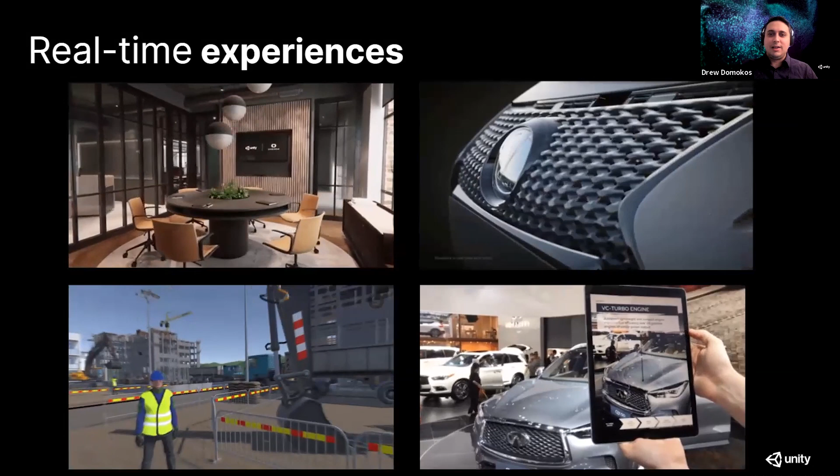And finally, what was 2D is now 3D. So rather than viewing content on the screen, we can see it in a real local environment, or we can be inside a virtual showroom or gallery. Working with 3D content, like what we see here, provides a number of benefits. First being immersion. As our world is in 3 dimensions, we move and think and experience in 3D. So compared to traditional static content, the extended spatial presence of being in a virtual environment brings enhanced problem solving, higher levels of engagement, understanding, and much more.

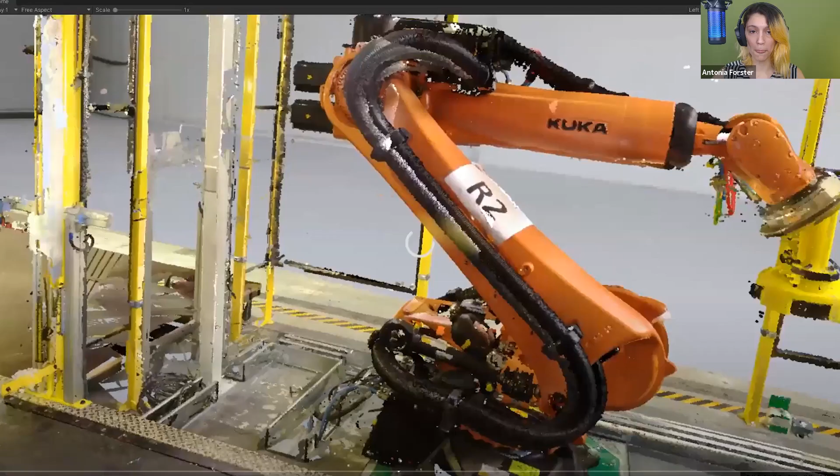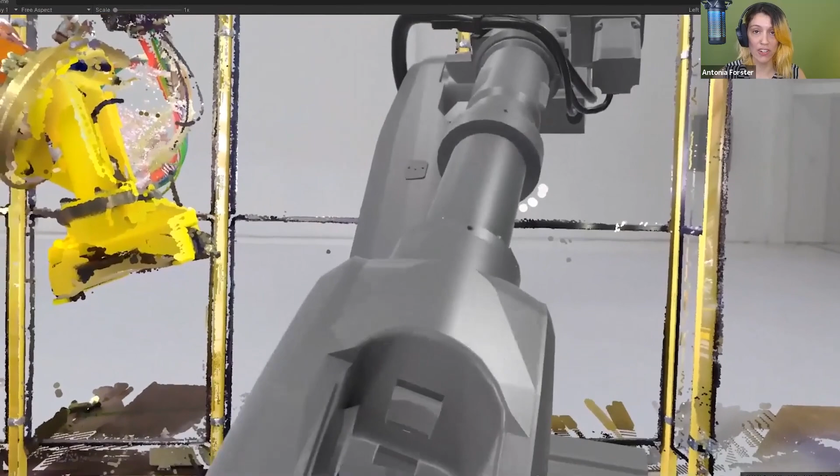This is a sneak preview of what you will be able to make by the end of this talk. First, we're going to use a point cloud scan of a factory to validate the position of a piece of equipment. I'll show you how to implement clash detection to check whether an engineer can safely access and operate a piece of machinery, or whether that would cause a clash or collision in that specific location on that site. This can save a vast amount of time and money in relocating equipment.

Then we'll take that same scene and implement VR safety training on top, so that you can teach the worker how to safely move across the job site, hazards that they should be aware of, and also how to follow the correct procedure to operate machinery.

So here's what we'll be covering today. First, why do you need VR safety training? What are the benefits and what's the return on investment? We'll be looking at case studies from industry leaders and looking at what is possible just using the Unity editor alone. Then I want to show you what's possible with two additional pieces of software, both verified solutions partners of ours with products that work on top of the Unity editor.

First, we'll look at Interact by Light and Shadows and some of its capabilities, which includes importing point cloud scans of your environment, implementing clash detection for validating equipment position or safety, VR training, and even things like ergonomic analysis.

Then I want to look at a second solution called Weaver. Weaver is also a solution for VR training, but is quite a different set of tools than Interact. Specifically, it allows you not only to build VR training, but also to deploy it at scale across your organization, manage who is accessing it, receive analytics on their performance, and so on. So you can go from a proof of concept to really an integrated solution across your enterprise or organization.

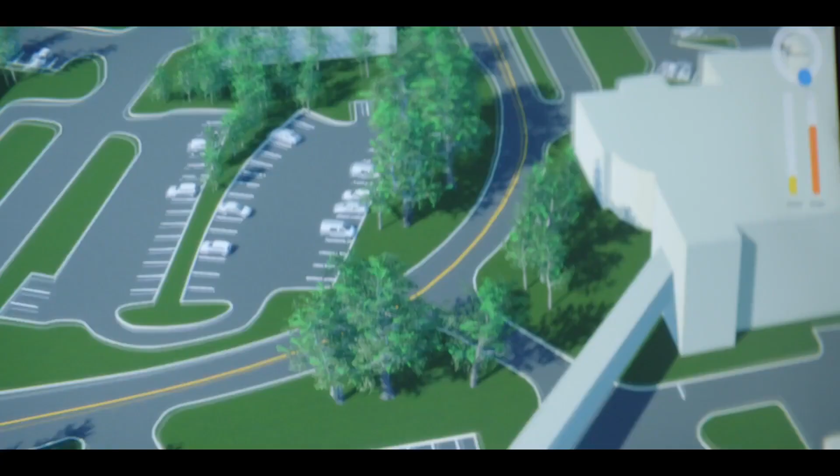Next, we have the engineering, how it will be built. Foundations, structure, interior build out, different systems, mechanical, electrical, plumbing. When you see something in scale in the real-time engine, it affects your decision-making. You think about logistics, mobilization, you think about safety differently.

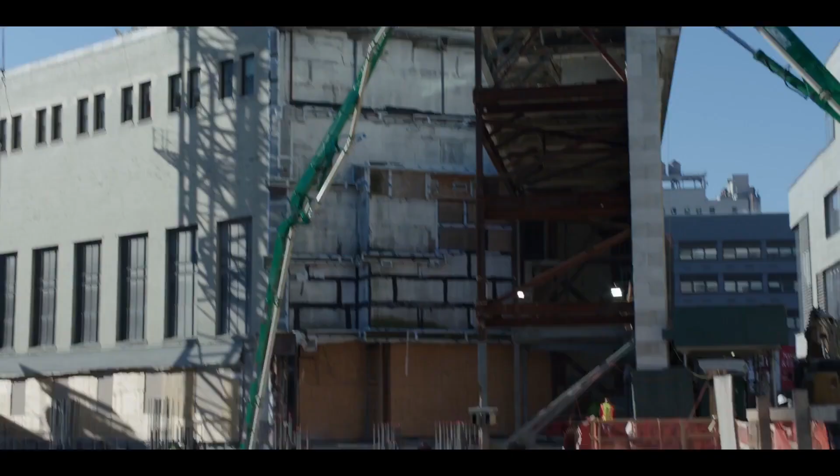Third, you have construction, the actual excavation and the erection of the building itself. With on-site construction, augmented reality, we can actually overlay the entire building in front of the developer. It gives us an opportunity to solve problems before they arise and to give our clients what they want.

Fourth is marketing. A lot of times you're building condominiums, office space above, retail space below. You need to market, you need to sell, you need to get tenants inside of your building. Well, we have this virtual, dynamic, real-time environment now that this potential client can go and walk through to sell the space. And finally, the maintenance, maintaining the day-to-day of the building and all of its systems.

We're able to do photogrammetry of the infrastructure behind these walls before the drywall goes up, so we can be minimally invasive when we need to inevitably go fix that pipe. The use cases are endless. If we allocated enough resources to this, we could change a $10 trillion industry. We can change how buildings are built. Without Unity, all this wouldn't be possible. Let's just put it that way.

So as you could see in that video, Unity can really be leveraged for a whole range of use cases. So in this webinar, let's specifically look at VR safety training. What problems can Unity solve, and what benefits does it bring to you?

Well, last year's Safety Management in the Construction Industry report by Dodge showed that the most effective safety training is site-specific. At the moment, 75% of contractors rely on supervisors or foremen to conduct training for them on site, as opposed to using a third-party trainer or online methods.

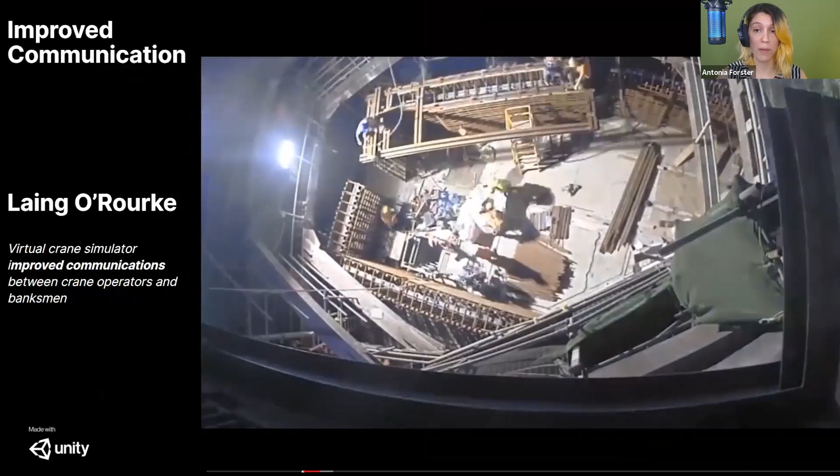Laing O'Rourke, one of the largest privately owned construction companies in the UK, used Unity to create VR safety training. They created a crane simulator to train their lifting teams. The training scenario is multiplayer.

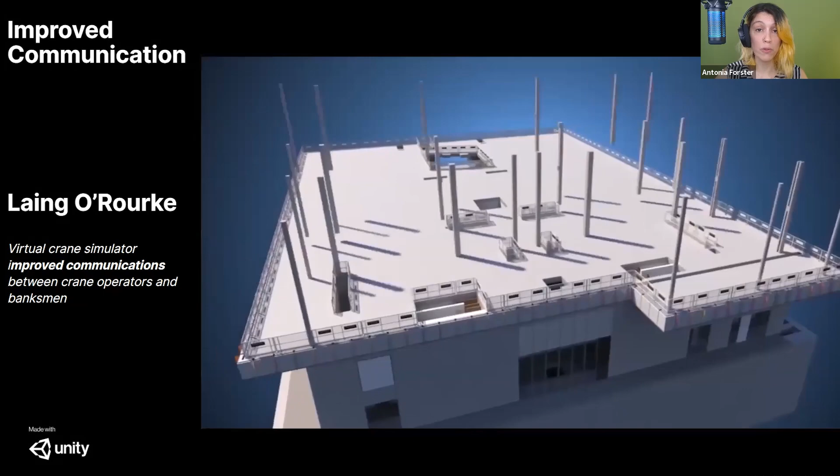The crane driver is sat inside a virtual crane and has to follow a banksman's instructions. This not only improved communication on their lifting teams, but also between different teams and had knock-on benefits across the whole organization.

Vodafone commissioned MakeReal, an immersive content developer, to create a working at height training experience in VR. Now, the target of this training wasn't the actual crew, but their managers, to increase empathy and raise awareness around the dangers of the job.

This was to help them understand the risks that their workers face and the importance of PPE. This community of stakeholders is large and works across 20 different territories around the world, so it would have been impossible to get them all on site, not to mention the obvious danger of trying to simulate this in person.

The experience was highly successful. In fact, they found that many people couldn't actually make it to the end of the scenario because it was so immersive and a bit frightening. So they created a second scenario where the user is on a rooftop instead. This training won the AIXR VR Awards in 2019 for VR training and education.

TfL, the government body responsible for most of the transport in London, approached MakeReal to create a VR site induction and health and safety training for a large construction project in Crossrail.

This allowed their site induction to be carried out remotely, so new starters had all the knowledge they need before they came on site. This was also used to teach new workers about site-specific hazards they might encounter, and is now used to show potential apprentices what working at TfL looks like.

As we saw earlier, VR learners have more confidence, learn more quickly, and retain the knowledge more than learners using a website, a classroom, or learning from a talk.

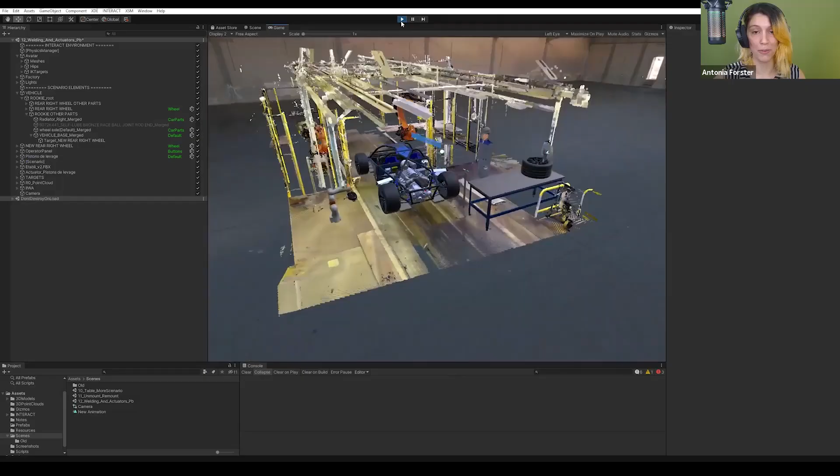Interact, as we'll see in just a moment, is a tool to provide real-time simulation of anything that involves humans.

So every process in a factory or a job site that involves a human, whether that's assembly, maintenance, safety training, or site induction, you can use Interact to validate or implement that process in VR.

For example, you can jump into VR and manipulate equipment, see a cross-section or an exploded view, and you can create training to train engineers on procedures, to check that they're able to safely access different parts of the equipment.

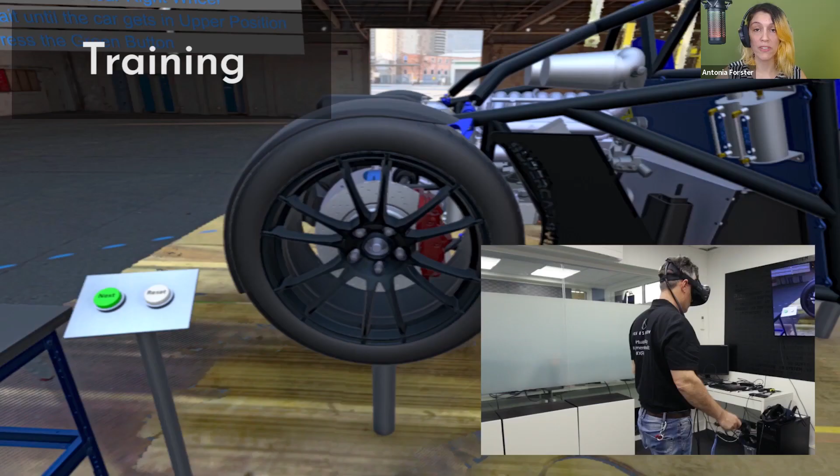You can even use it to find out the best way to maneuver a piece of equipment or a pre-manufactured product through your factory or through a busy job site.

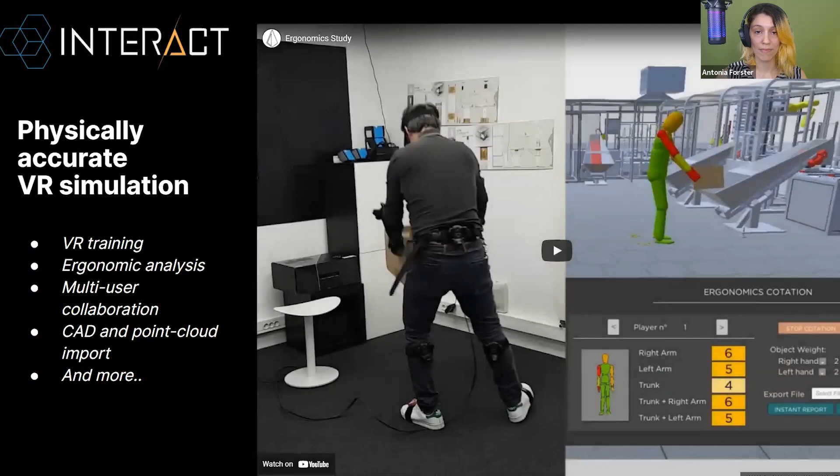The features that Interact boasts include CAD and point cloud data import, a highly accurate physics simulator so you can run complex safety simulations, support for multi-user collaboration, and the ability to build VR training.

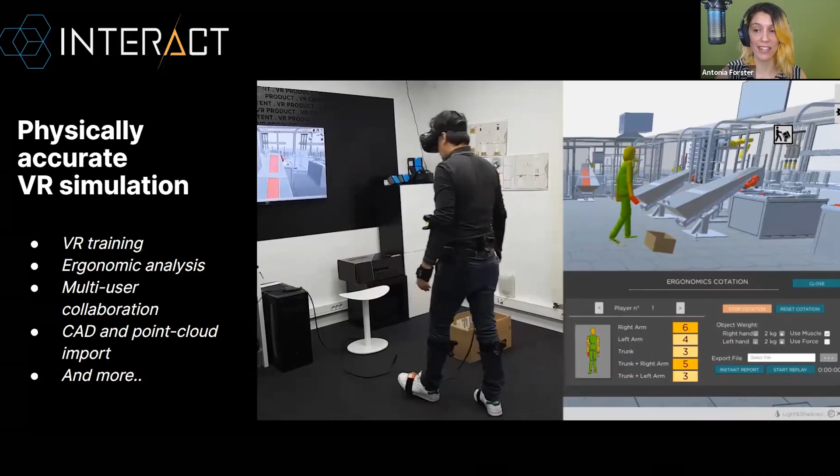Since Interact supports hand tracking and full body tracking, it can also be used for real-time ergonomic analysis, as you can see in this video, which means you're able to validate and design workplaces in collaboration with the specific people who will be using them. Getting their feedback at this stage is invaluable because management might hesitate to make changes to workstations after manufacture because of the cost.

But at this early stage, they're much more able to give the green light. So just like the Unity editor itself, Interact is flexible and can be used for a wide range of functionality. In this demo, I want to show you how you would use Interact on top of the Unity editor to import a point cloud scan of your job site, implement clash detection for safety validation, and how you could test this in VR.

The first step would be to obtain the Interact software package, which you can do from the Light and Shadows website or on the Unity product page. I'll show you the link for both of those at the end of the talk. Once you register, you will receive a package and a product key via email. You'll also need to sign up for Unity and download the Unity Hub, which is completely free.

And finally, you'll want to take a point cloud scan of your environment, which is now very easy to do on an iPad or an iPhone, and then save this to your machine, ideally in a .e57 format.

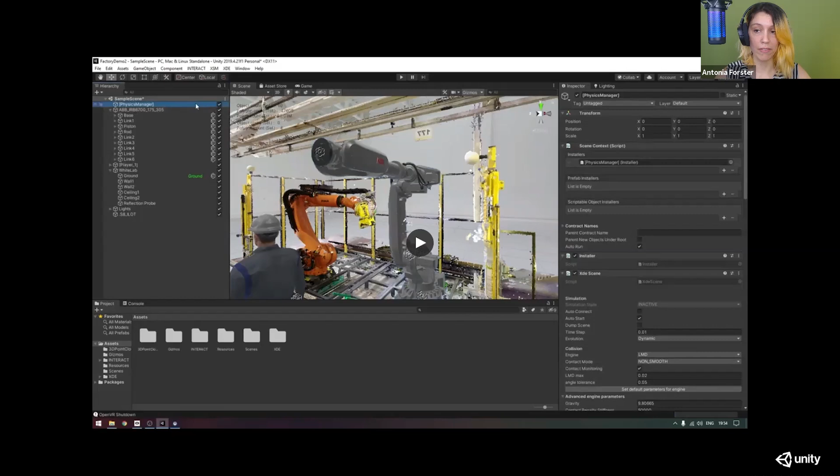From there, the next step is to open the Unity Hub and start a new project. For compatibility with Interact, I recommend using Unity 2019.4. If you don't have that version, click Installs, then Add, and select the Unity 2019.4 LTS from here. So choose your version of Unity, then give your project a name and destination. Leave the template as 3D and click on Create.

Once the editor is open, you'll want to import the Interact package. To do this, just navigate to where you've downloaded it and double-click on it. In this window that pops up, click Import. This may take some time. A window may appear displaying recommended project settings for Steam VR, and if so, just press Accept All.

Now that Interact is imported, you need to validate the license. To do that, click on the new Interact button at the top, and then License Manager. If you're using a standalone license, you'll receive a product key, which you can enter on this page. I've already entered mine, so I'm just going to close this window.

Now we're ready to start using Interact. To set up a new scene, click Interact, Create New Simulation. You have two environments to choose from, the laboratory or the factory.

Next, you want to select the platform or device that you'll be building to. The supported options are Vive headsets, Oculus headsets, Windows mixed reality headsets, a traditional desktop setup, or a cave system. Interact also supports hand tracking using a Leap Motion device or Manus VR gloves, or alternatively can support full body tracking with an art suit or a Light and Shadows suit.

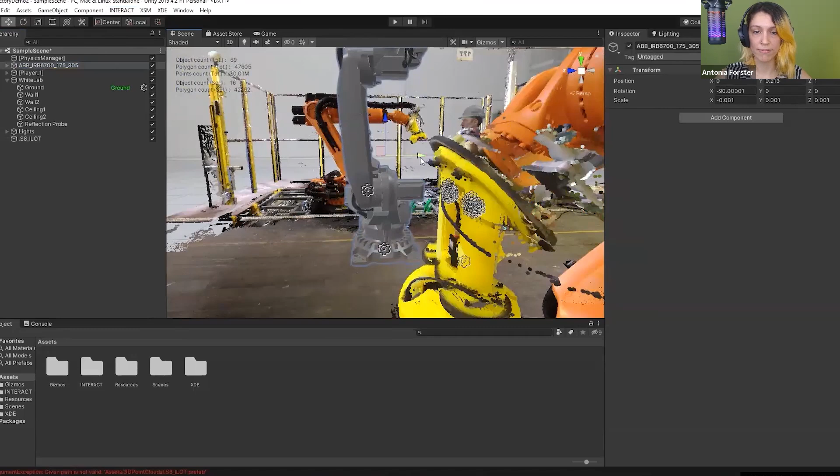Now we want to set up clash detection. To do this, select the physics manager in the hierarchy, scroll to the bottom, and find the component called OctoPCL Collision Scene. There are two fields here. The resolution value is in meters, and this is a bit like chopping your scene into cubes of that resolution. If you choose a lower number, the collision detection will be more precise, but it will also take longer to launch.

The minimum point intersected field is the threshold at which your system will decide there is a valid intersection or collision. If you set this higher, the system can tolerate more noise, which is useful for ignoring false positives if your point cloud is noisy. The lower the number, the more sensitive the clash detection will be. So I'm going to set it to 2000.

Now select the model that you want to check intersection with. In our case, that's the robotic arm on the right-hand side. Click on Add Component, OctoPCL Mesh Collider. Also add the component called Mesh Collider Renderer. Look at the Mesh Collider Renderer component, and if that field at the bottom is empty, just drag in the OctoPCL Mesh Collider as a reference. Note that this will only work with a mesh collider, not a box or capsule collider.

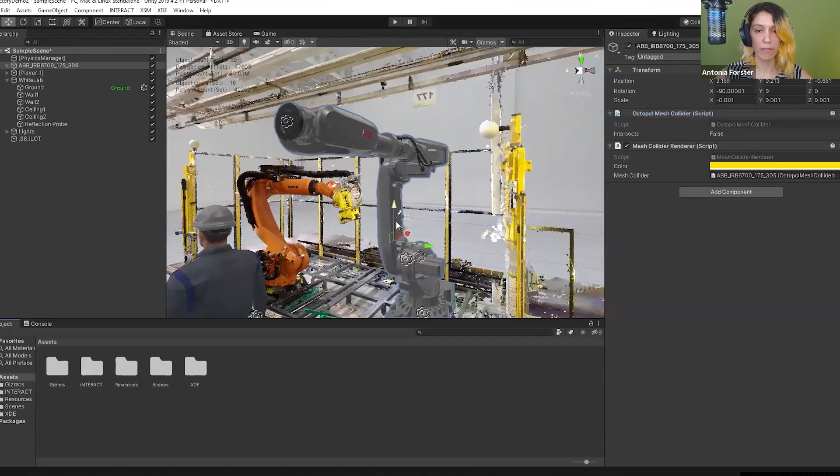Finally, right-click on the model and select Interact, Point Cloud, Check Intersection. Now click Play, and we can see that the parts of the robot that intersect with the point cloud will turn yellow. Here we can see the base is colliding with the floor.

Please note that we cannot at this point move the model around in the scene with the arrow gizmo like we did before. That's because Interact physicalizes the model, which means we can move it only within the constraints of its realistic range of movements.

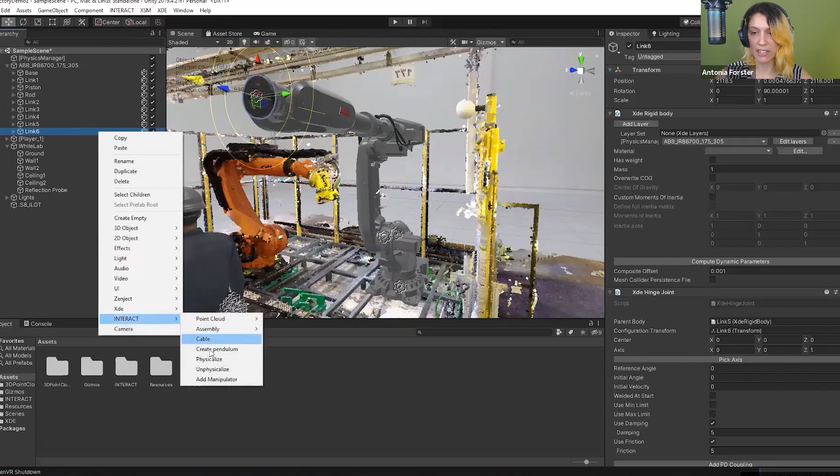In order to enable movement in the editor, decide which part of your model you want to move. I'll choose link 6, which is the very end of the robot arm, and click Interact, Add Manipulator, and press OK. An object called an XYZ manipulator will appear in the hierarchy. Click Play, then head back to the scene view. If we now drag the XYZ manipulator around using the arrow gizmo in the editor, our entire model will manipulate itself appropriately to place the end of the arm as close as it can to that manipulator's transform.

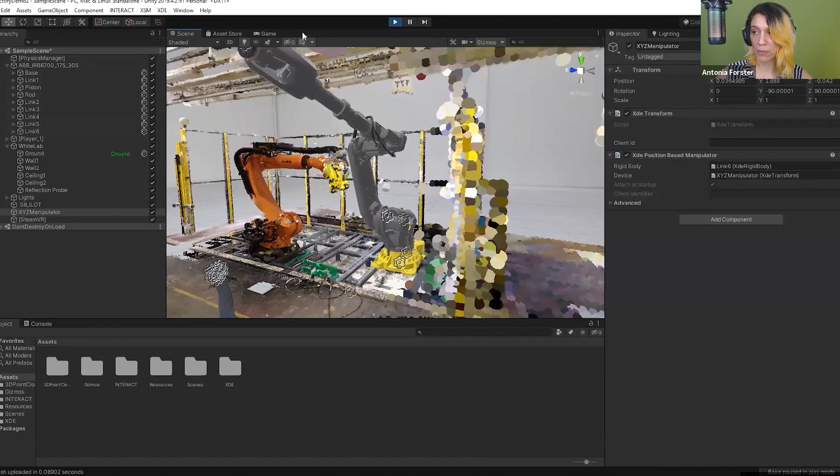We can manipulate the model in this way and see where it would clash with the scanned environment. For example, in this environment, we can see that when the robotic arm is moving left and right, this part at the back is colliding with a pillar.

If this was a rigid part like a handle, it could mean that this particular position is totally unsuitable for the machine and it has to be relocated. Or if this is a flexible part like a hose or a cable, you could expect this part of the machine to experience more wear and tear, and that knowledge can help you optimize your operations.

Now we want to make the machine grabbable in VR rather than in the editor. To do this, we must first remove the XYZ manipulator. To do that, we're just going to right-click on it and press Delete.

In order to make a part grabbable in Interact, we have to check if it has been physicalized. We can check that by looking for this cog icon, which means that it has, or alternatively, by checking in the inspector to see if it has the XDE rigid body component. If it has either of these indicators, we know that we can make the part grabbable.

To do this, just right-click on the part and select Interact, Assembly, Make Part Grabbable. This adds a component called an XDE ASB part.

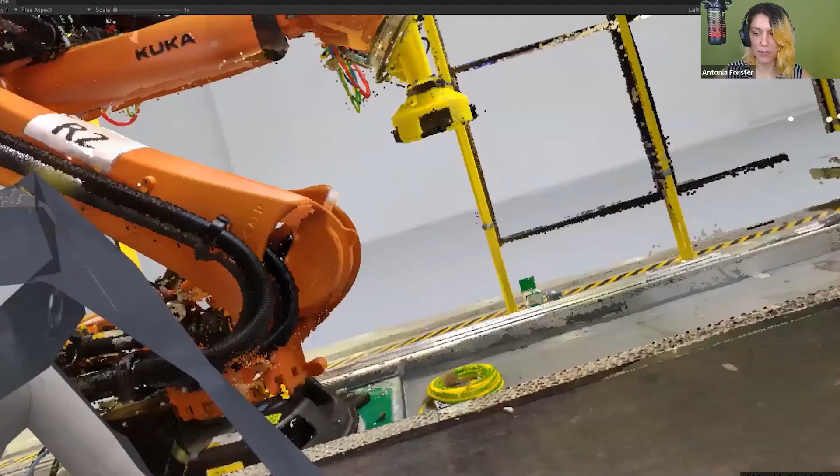If we press play and then jump into a VR headset, we can now grab that part of the machine and manipulate it, just like we did in the editor. If we move the robotic arm in a way that causes collisions with the point cloud environment, we can see that the clash detection is still operating, and it will turn the part yellow to warn us.

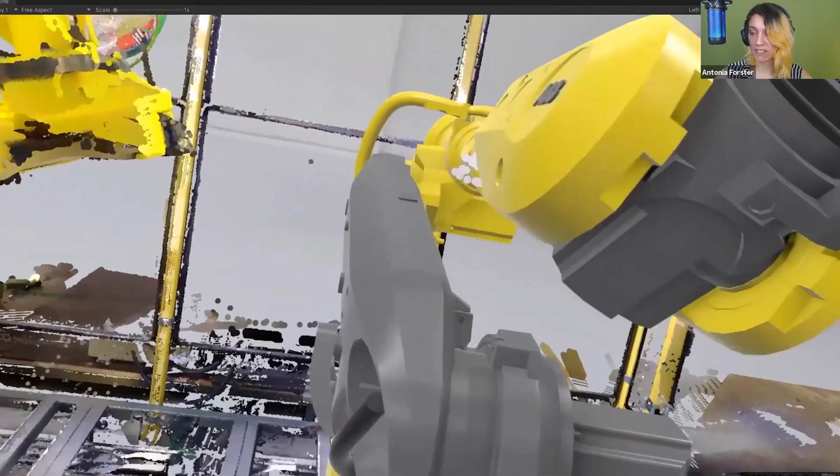Not only is that an excellent way to validate whether a piece of equipment can be safely operated and to teach the worker how to operate the machine safely, but this workflow also allows you to see whether a piece of machinery can be maneuvered across a site without causing any collisions.

Since point cloud capture is now possible in just 1 or 2 minutes on something as simple and inexpensive as an iPad or an iPhone, you can validate these scenarios not just with a theoretical model of your site, but a scan of how it actually is that week or even that day.

It also allows you to see whether engineers or on-site workers can safely access the specific parts of the equipment that they need to access, whether that's for routine procedure or maintenance.

Interact includes tools to allow you to build VR training. So we could take this same demo and, continuing in the same tool, turn it into a VR safety training application, perhaps to create a proof of concept and to get buy-in from your organization.

But one of the big challenges is scaling beyond that proof of concept project and bringing VR training into real production at scale at an enterprise level. How do you do that? That's where a different product called WEAVR is really able to offer a huge amount of help. I'll now pass over to Moussa, the technical product manager at Pace, to tell you more.

Thank you, Antonia. My name is Abdurrahman Moussa. I am the technical product manager for Pacelab WEAVR. As the title states, WEAVR extends Unity to a complete training solution. Allow me to introduce you to the Pacelab WEAVR platform.

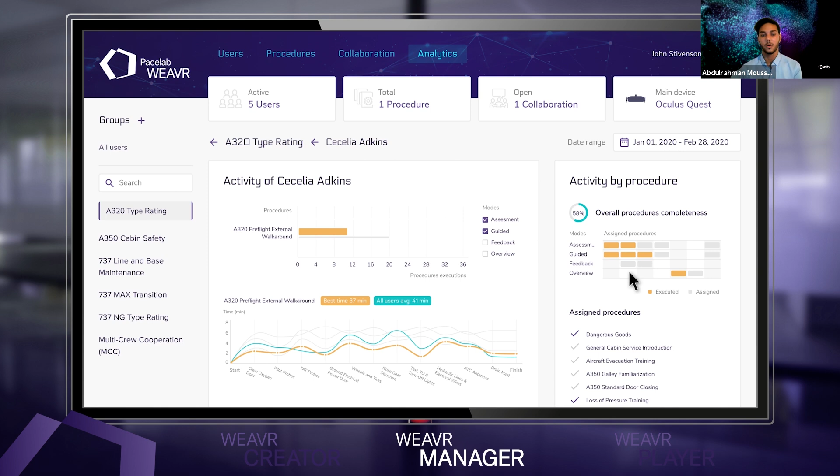Moreover, you're able to create a collaborative training scenario by choosing the procedure, inviting the users or group, and adding the instructor for that training. You could see the list of invited people to this particular training. Moreover, you can gain training insights and analytics about the individual user or about the group of users.

Now, navigating to the WEAVR Player, which is the execution tool, it acts as the central application to access all your XR content from a single unified interface. You can see the procedure, select the training you would like to execute, and choose the execution mode. For example, we're choosing the guided mode in that case.

So this is a use case where we're training the pilot to inspect the components of an aircraft before a departure. With the guided mode, there will be guided annotations, billboards, and audio.

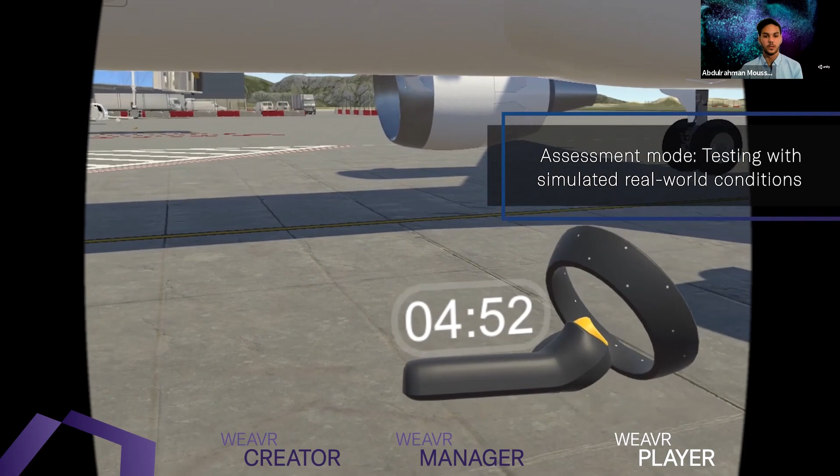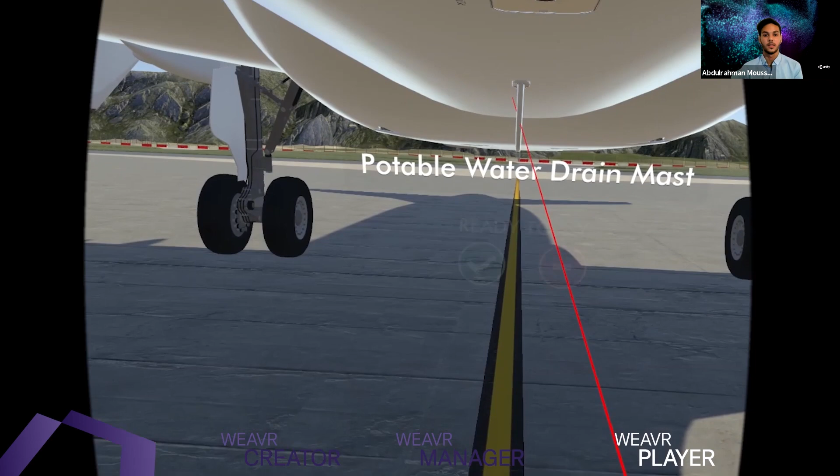Now with the assessment mode, we have simulated real-time pressure, where they have to inspect the components of the aircraft before the departure. If a component is damaged, that means the aircraft cannot fly with it, so it's not ready to fly. If it is not damaged, then it is ready to fly. Once the procedure is completed, you can see real-time feedback about your execution process within the training itself.

Now, seeing what Pacelab WEAVR is about, let me show you how to get started by building a new procedural training with Interact. First, we create a new step and define an enter action. For instance, we add a text-to-speech with a welcoming message to welcome the operator to the training field, and then we add a show billboard expert.

With the show billboard expert, we have a lot of different variables and configurations we can change. For instance, we can define a sample, choose an icon to display in the billboard - for example, an info image - and define the title, which is a welcome message, and the text we'd like to display, which is the same as the welcome to the site induction and safety training text-to-speech.

Moreover, you have different actions you can benefit from, such as choosing a start point for the billboard or an end point for it, choosing a world size dimension, and the visibility of the billboard. When setting the limits, you're able to see the billboard in its real scale depending on your actual position in the virtual scene - the closer you are, the smaller it will be, the further you are, the larger it will be.

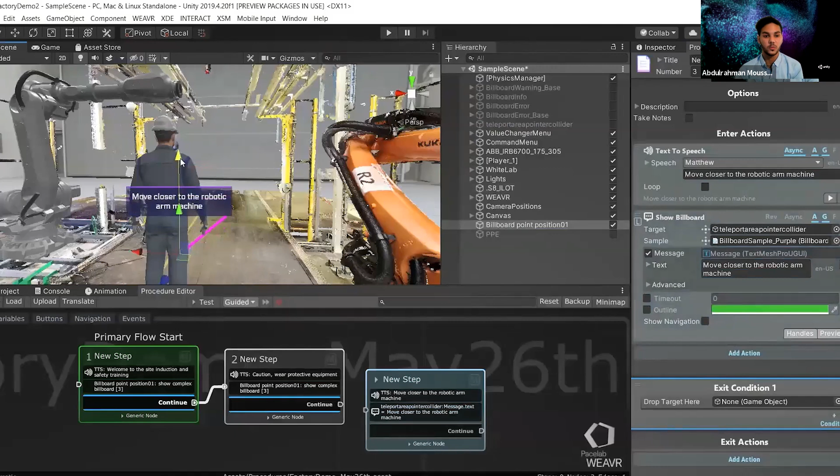Moving on to the third step, we add another text-to-speech, informing the operator to move closer to the robotic arm machine. In that case, we show a simple billboard, and you'll notice the difference - with a show billboard, you don't need to configure all those variables. All you need to do is drag the target and specify the text you'd like to display. Once you hit the preview button, you can see the preview of this billboard in the scene and position it the way you'd like, wherever you'd like to see it best.

Once you do that, you can save this and define an exit condition. In this use case, we add an exit condition to ensure the operator is standing at the right position and has moved closer to the robotic machine. We're using an object-is-in-area condition coming from the WEAVR asset - all you do is drag and drop the VR camera and specify the area you need to use.

We link the steps together and move on to the fourth step, similarly adding a new text-to-speech where we inform the operator to make sure the robotic arm machine is off before touching it, giving this as a warning billboard sample. We've changed the sample of the billboard and chosen a warning message indication. We position this in the scene and define the exit condition in that case.

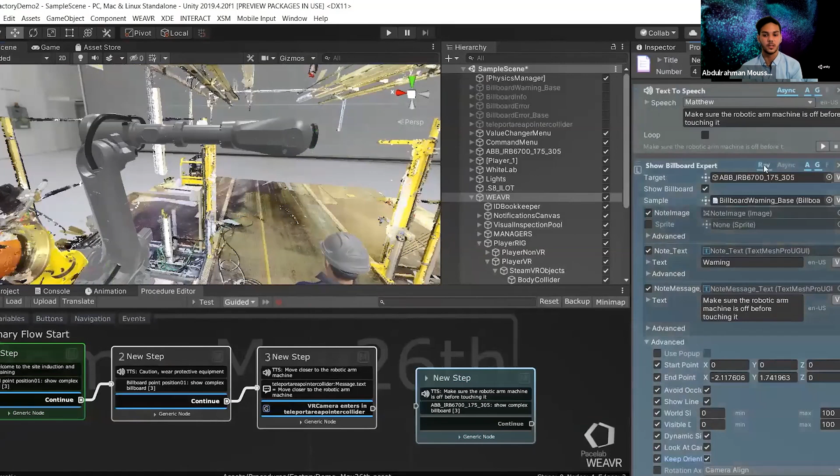What's interesting about this part is where the interactions come from - we're using the grabbable behavior defined and coming from Interact. We specify the condition when we drag and drop the Link 6 game component: we drag and drop the game object, choose the behavior grabbable, which comes from Interact, and ensure it is true. Once this condition is saved, that means in order to move to the next step, the operator has to grab the object from the robotic arm machine.

Now we move to the last step, adding a wait time in the procedure training so the operator has a few seconds to move in the scene, and then we provide the congratulations message. In that case, the operator will know they've completed the training scenario.

Now, once the procedure is completed, we need to upload this to the manager. To do the upload, we navigate to the upload button and build the asset bundle of this particular procedure. This may take some time.

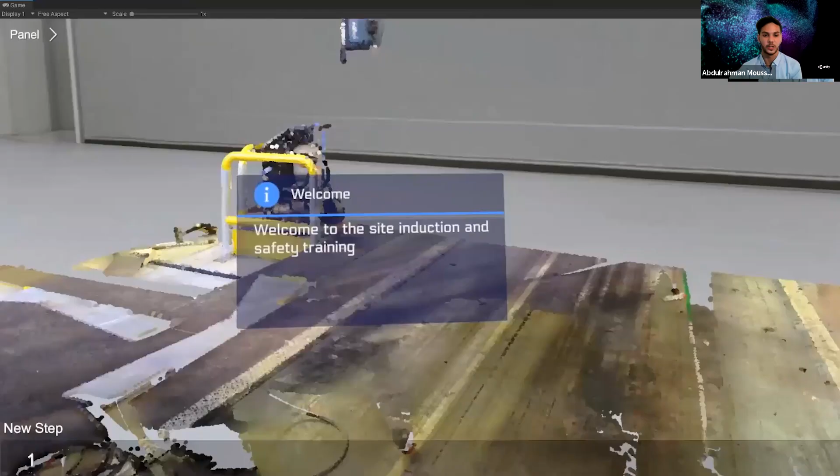Once we hit the start button, now we are inside the virtual environment that we have just created together. We see the scene, the model that we have imported, and the welcoming message that we have created. Now we're displaying the caution message to inform the operator that they're wearing the protective equipment.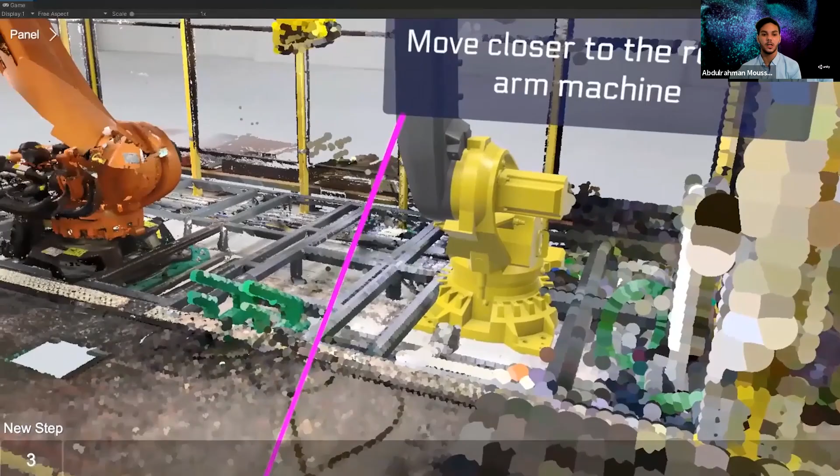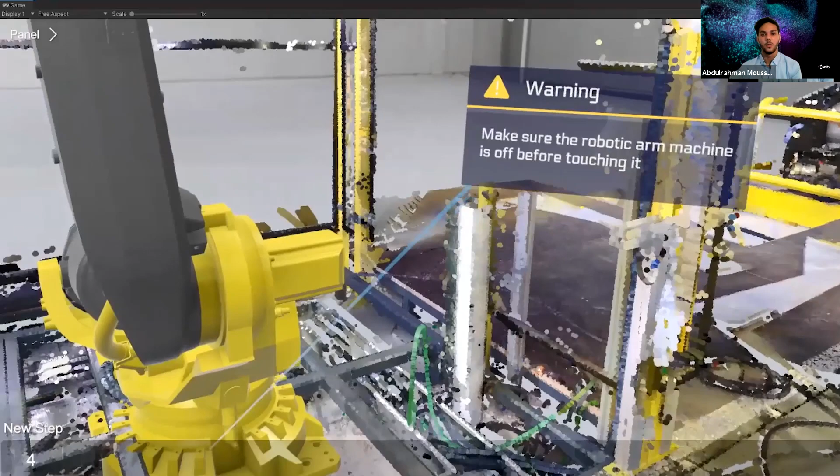Now we are guiding the user to move closer to the robotic arm machine. Once we're moving closer to the machine, it will trigger the next step, which is giving the warning message to inspect the game object and make sure it is clear around the surroundings of this model. Once the inspection is completed, we are triggering the next condition and guiding the user to grab the endpoint of the arm machine.

When we're grabbing it, we will be able to see the interaction that is coming from Interact. And we will see the collision if it is crashing with the components around it, and we see the highlighted color in that case. So with that being said, we are able to create a VR training scenario using Weaver Creator plus Interact.

With all this being said, Weaver is your complete training solution for any XR application that you would like to develop at your organization. And now I'll be passing back to Antonia.

So hopefully now you all attending here today have a better understanding of the benefits of VR safety training and site induction, a good understanding of the different options available, the knowledge required to pick the tool that suits you, whether you want to use Interact only, Weaver only, the Unity editor by itself, or all three in combination, and also the ability to use one and build on top of it with the other tool.

But this presentation has barely scratched the surface of what Unity has to offer. We have specialized solutions for visualizing BIM data, for creating marketing materials, for machine learning, and for product configurators.